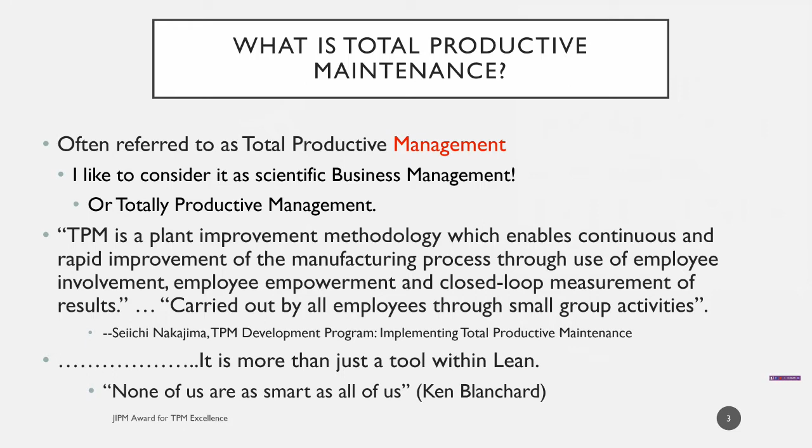In 1964, the award was just called the PM Award from JMA, Japan Management Association. It was changed to the TPM Award in 1971, and the first award outside of Japan was issued in 1991. Since then, only 93 awards were issued to 87 facilities in the United States. However, a total of 3,500 awards were issued globally since that time.

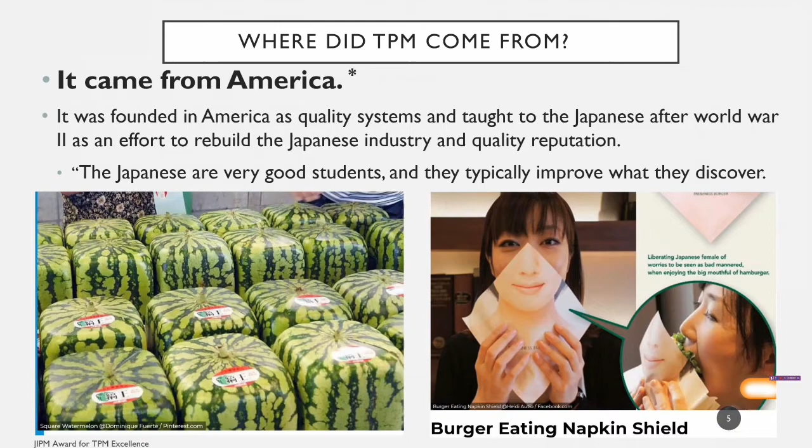Okay, so I think TPM is great, but where did it come from? The answer may surprise you, it may not. Actually, it came from America. And it started over 100 years ago in the 1920s. This is not new stuff. The Japanese are very good students, and they improve whatever they discover. So they did a lot of improvement over 100 years. It shares the same family roots as many systems commonly used in the United States today.

In 1947, Dr. Edwards Deming visited Japan as part of the U.S. outreach to help Japan reconstruct their economy after World War II. Those of you in the audience who are familiar with the quality systems and quality tools certainly will remember most of this story, and it'll be very familiar to you. In 1950, Deming trained engineers of manufacturing companies to improve quality and reduce manufacturing costs. He later realized that he was talking to the wrong people.

After training hundreds of engineers in the new methods and being asked for repeat performances before the engineering group, he began to speak directly to executives at major firms. And there he hit the mark. Just having smart engineers does not change the company. Management must believe in the scientific approach to manage a factory.

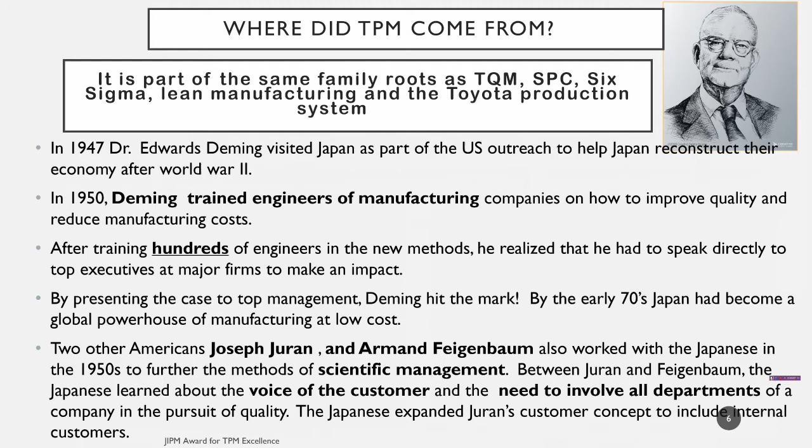The Japanese took to heart the teachings of Shewhart, Deming, Juran, and Feigenbaum and started to build one of the most powerful economic nations on earth. In 1971, the JMA created various awards for PM progress. And in 1981, the JIPM put the TPM body of knowledge into action and began to issue JIPM TPM awards.

Is lean part of TPM, or is TPM part of lean? Good question. The Lean Handbook from ASQ Quality Press covers TPM in 6 pages and defines it as a method for taking care of your equipment. They also credit TPM with one of the key metrics for any factory, which is OEE, Overall Equipment Effectiveness.

They also credit TPM for using several lean tools such as 5S, Visual Workplace, Pareto charts, root cause and corrective action, and standard work. But as I have learned over 16 years of deployment, TPM is not just about fixing equipment. It is about the proper way to manage a factory.

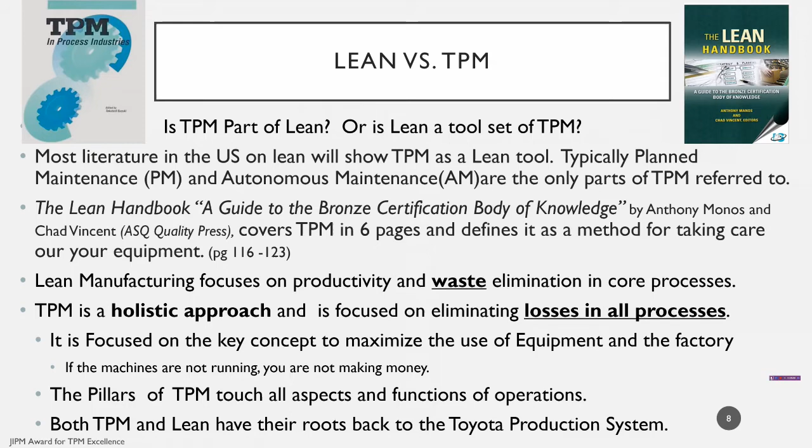TPM is a holistic and structured approach which defines key roles within an organization. And it is built on informative checklists and audits and reviews to assure that the entire company is focused on continuous improvements and holding the gains. This builds a strong improvement culture. The main thing is to keep the main thing the main thing.

TPM involves much more than just taking care of the equipment. The equipment must be running when it needs to run at full speed and making perfect quality. TPM achieves this by focusing on loss elimination. Take a look at some of the losses that might happen any day in an ink plant.

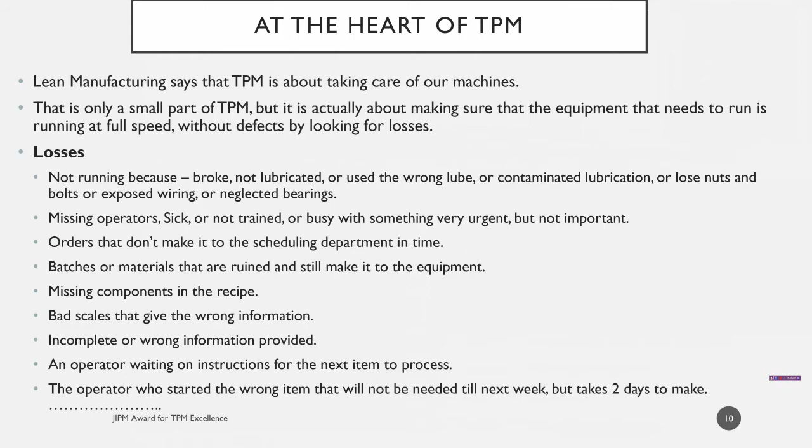Not running because something's broke or not lubricated, or you used the wrong lubricant and it seized up, or a contaminated lubricant and it was ruined, or loose nuts or bolts or exposed wiring or neglected bearings. Missing operators who are sick or not trained or busy with something very urgent but not important. Orders that don't make it to the scheduling department in time. All of these are losses that contribute to inefficiencies and delays in the manufacturing process.

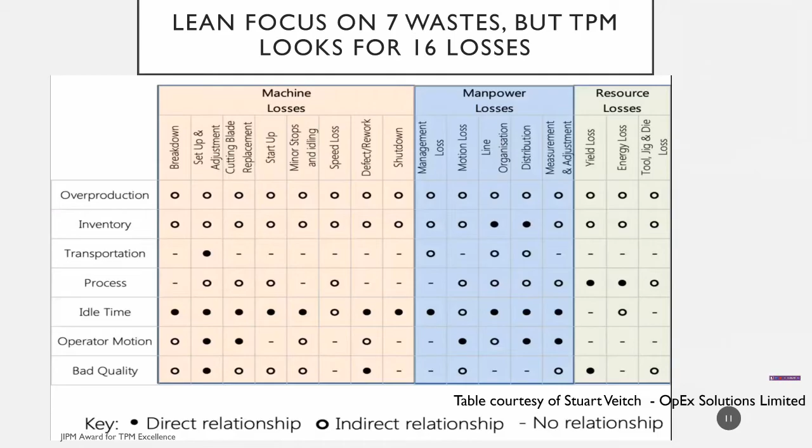TPM really emphasizes the importance of management living in the gemba, where it happens, on the workshop floor. It's difficult to solve problems and answer questions correctly while sitting in an office.

Visit with your operators and watch and listen. You will be amazed at what goes on, and you may discover things that frustrate the workers who make your products and your profits. It may also frustrate you to see what they're living with.

As mentioned before, OEE is an important metric, overall equipment effectiveness. It is a key metric. If a machine is available and it needs to run, it should be running 100% of the time at 100% of the maximum running speed, producing 100% good quality from start to finish.

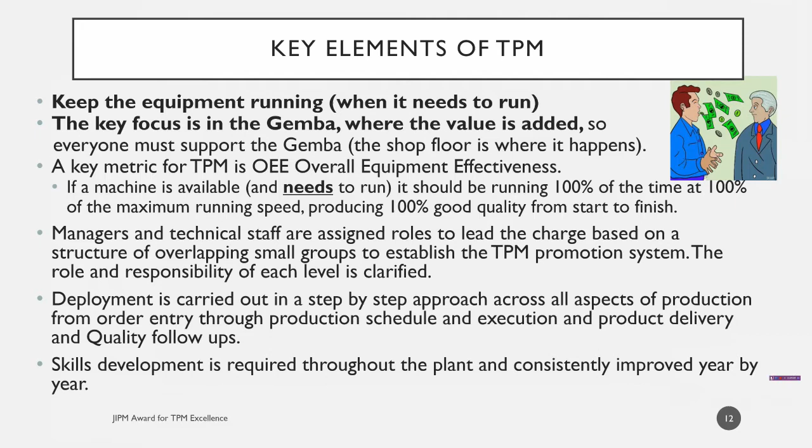Let's come back to the TPM award process itself. First of all, the TPM award is given to a facility, not a company, and each facility has to be qualified and assessed individually. The interesting point of the process is that by applying for the award, it gives everyone the opportunity to focus on understanding all of the fundamentals and principles of TPM.

If you review the requirements to pass, you soon realize that these are the keys to a successful and strong culture, which builds a strong business.

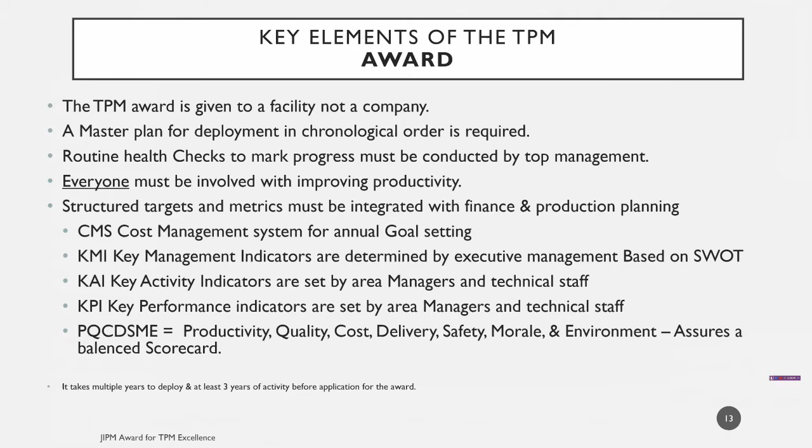You can see about the 5th bullet point down that the structured targets and metrics are integrated within finance and production planning. We have a cost management system for annual goal setting, key management indicators for executive management to use based on a SWOT analysis, KAIs, key activity indicators, which are set by managers and technical staff, KPIs, and a balanced scorecard called PQ-CDSME, which is shown in this diagram.

This board is used to track progress for each facility individually and as a whole. Each facility has a similar metric dashboard. Note that at the top of the board we have what I call the TPM Balanced Scorecard, or PQ-CDSME. You want to have metrics monitoring productivity, costs, quality, delivery, safety, morale, and environment. All these are covered by TPM using a pillared approach.

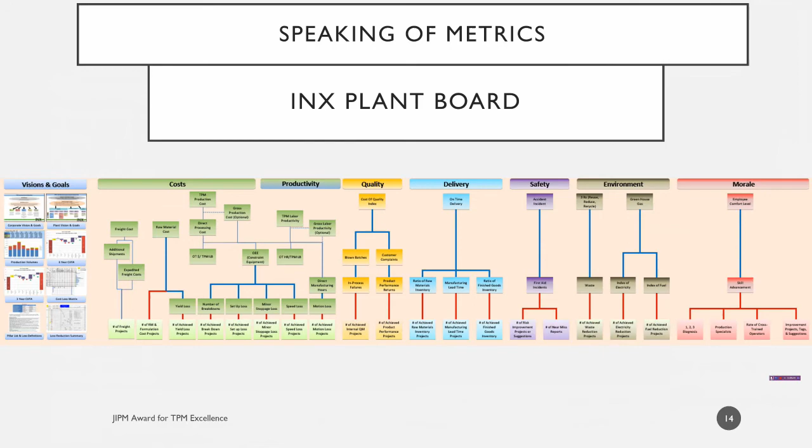There are several key checklists depending on award level. For the first 2 awards, there are 3 pages of checklists that contain 10 items for overall TPM policies and objectives, 10 items for effects and evaluation, and 10 items for each pillar of TPM.

If you're a pillar leader or a pillar guidance person, these 10 items show what should be achieved by that pillar. And then finally, 10 items for evaluation of overall results. If you want to see how your plan fares, download the checklist and rate yourself on all the points.

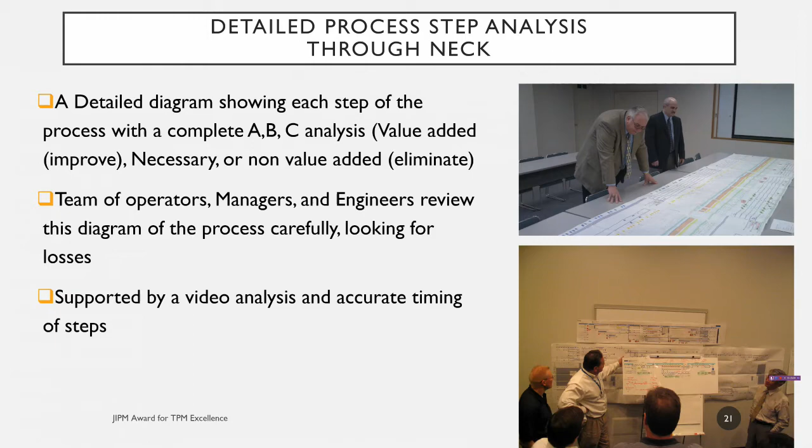One of our managers noted to me later that the Japanese just don't get it, they don't understand America, we build our parachutes on the way down. But today, in retrospect, the COO of our company has worked through many such analyses and thoroughly understands the complexity and the power.

And the value of this analysis tool. All right, so we got started with support from key executives of our parent company and the key executives of INX International. We then started to align our resources.

One of the key concepts of TPM is the concept of small overlapping groups in the organizational structure. From the graphic, you can see how this concept is implemented at the company. A member of each group is a leader or a member of the next lower group. These overlapping groups allow information to flow both up and down the organization without any problems.

Besides the overlapping groups in the command chain, we also had a support and promotion team of experts that supported all locations as needed. Many members of these support and promotion teams were actually pillar leaders, and most were also members of the operations management teams.

You can see on this side the plant structure, where each plant had a steering committee with various pillar coordinators identified and a chairman, and this committee was used to monitor results and track progress at their location.

On the right side, we had a corporate support structure that involved corporate pillar leaders, most of these being vice presidents or members of the operations management team, or management in general, as well as the board of directors, etc. From the top to the bottom and back up again.

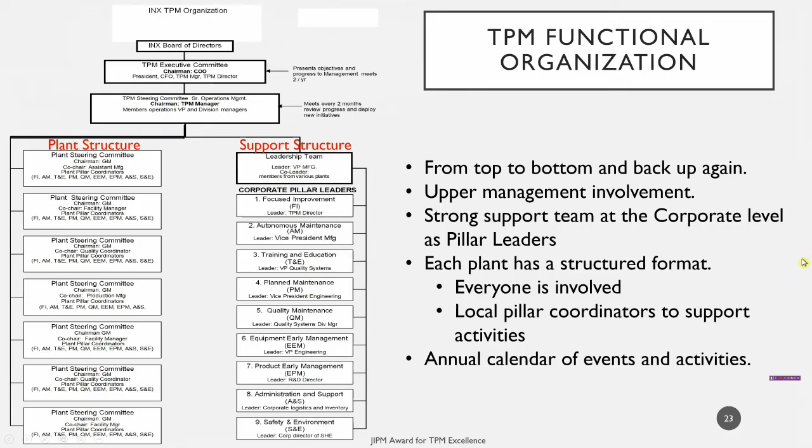Earlier I mentioned the checklists that are provided by the TPM application outline. Besides being the checklist for the assessment process, these checklists are very helpful as guidance documents for each pillar leader and all company members to see where you're headed, where you're going.

Within the scope of most lean activities, American deployment of TPM typically stays focused on autonomous maintenance and planned maintenance, as you can see here. And you'll find these pillars identified clearly in most activities for lean. But actually, TPM must be deployed across all 9 pillars, as identified in this chart here.

For the chemical industry, processing industry, we split early management into 2 pillars. So it's actually 8 pillars, but we split early management into 2. In essence, early product and early equipment management both use the same logic flow and similar planning tools, but it is also extremely important that early product and early equipment management work together directly.

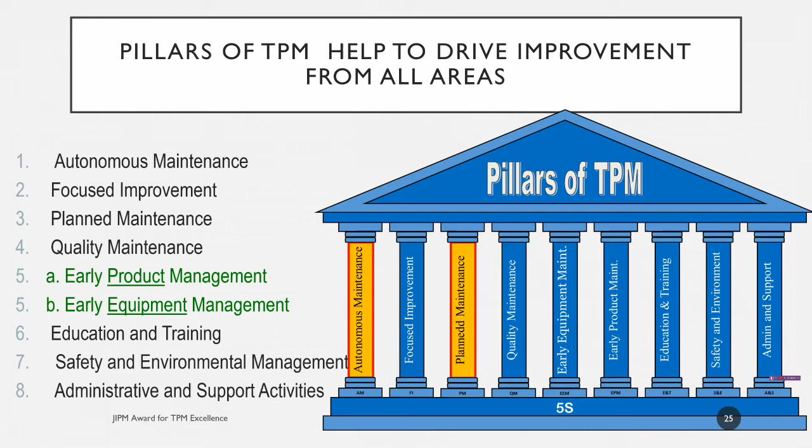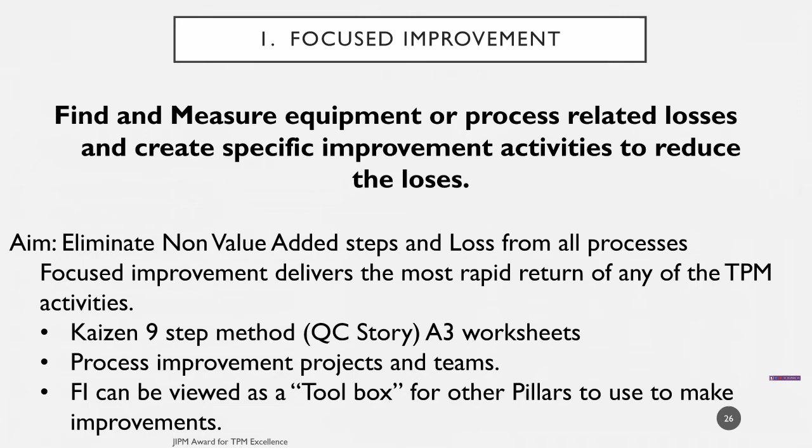So let's take a look at these pillars and see what each of them does and how they have an impact on the facility. First, focused improvement builds the skills for making scientific improvements to all of our processes. These projects can be conducted in any way, in any area of the plant, within any pillar. This is where the famous term Kaizen, Japanese for improvement, is put to work in TPM.

Number 2, autonomous maintenance involves every machine operator and every professional maintenance person working together to ensure our factories run smoothly without interruption due to machine failures. It is achieved by improving the operator's knowledge, making safer working conditions, improving the shop environment, and increasing employee morale.

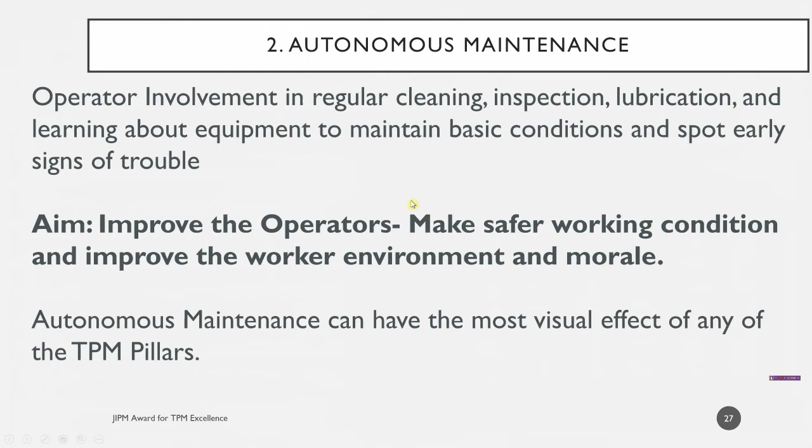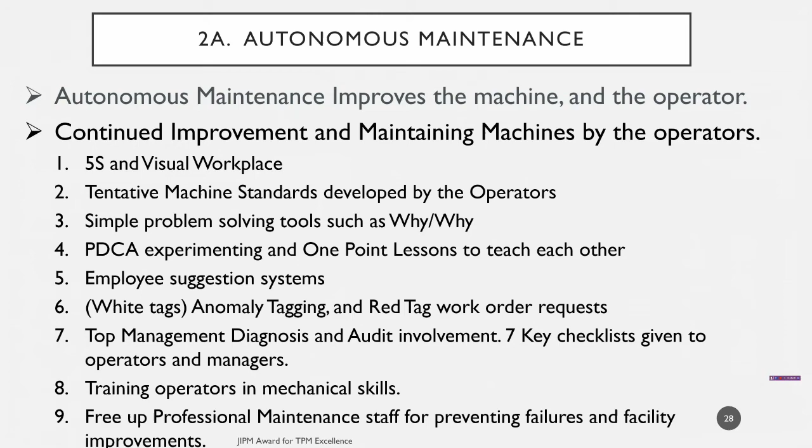I have personally conducted over 100 diagnosis meetings where we met directly with operators who were AM team members. I learned more about what happens in the company's factories than anyone can imagine by listening to the operators in these diagnosis sessions.

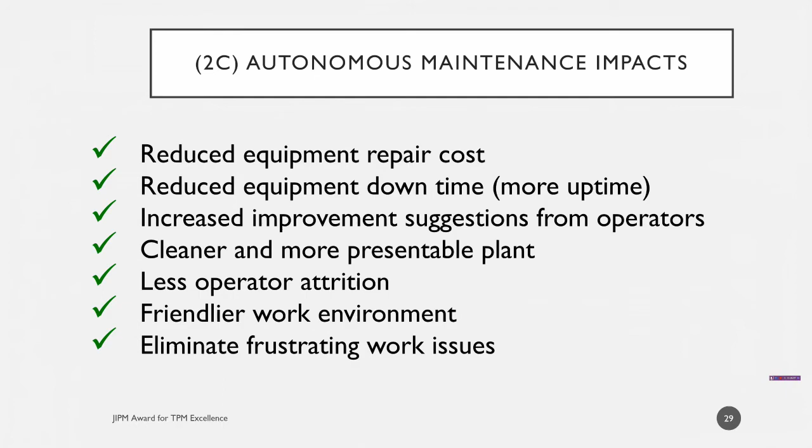Second pillar, autonomous maintenance, has many impacts on the manufacturing facility. This slide shows some of the key impacts that you can achieve.

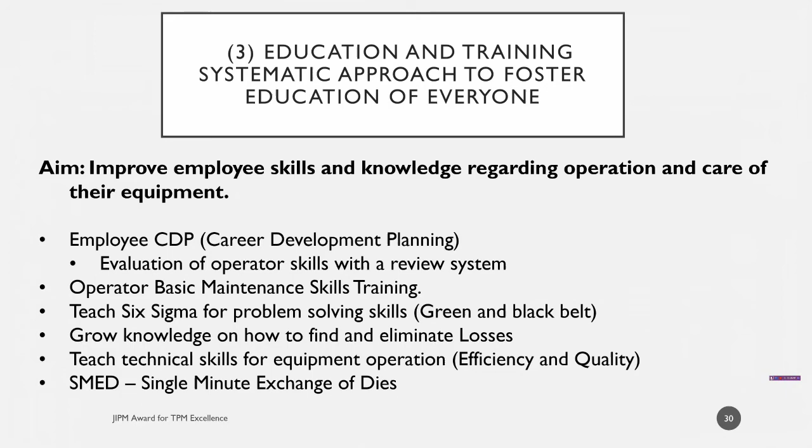Moving on to the third pillar, we look at education and training. Management values every employee, and using this pillar in TPM, the key is to improve operator knowledge and all persons' knowledge in many areas to help them thrive in their work and their professional life and career.

One specific training program required of all production workers is the autonomous maintenance operator basic maintenance skills class. This activity takes a long time and involves 3 TPM pillars working together: education and training, planned maintenance, and autonomous maintenance.

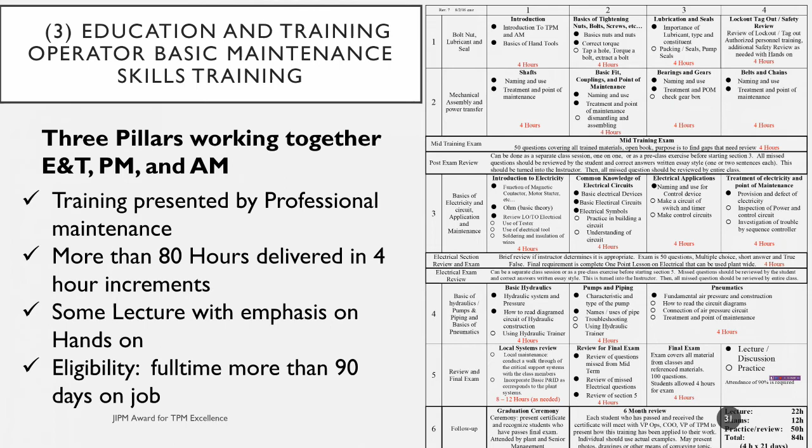After they complete this course, not only can they understand and sense when something's wrong with the equipment, but it also helps them with a lot of home fix-it tasks that they may need or want to do.

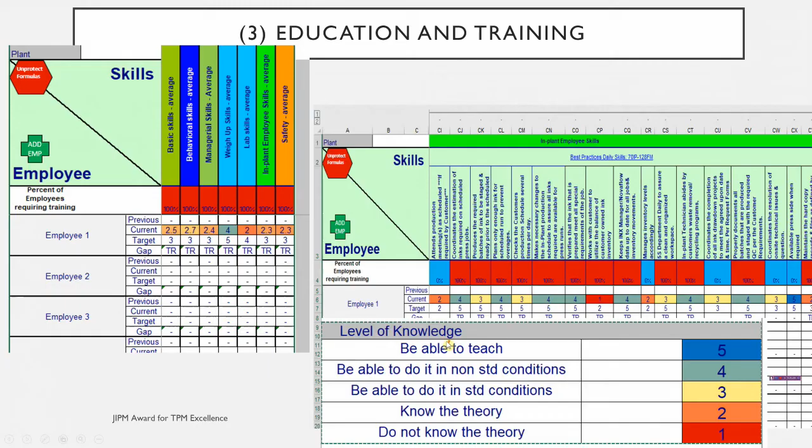Planned maintenance oversees the maintenance activities required to keep our equipment running at peak performance. Key elements of the PM pillar are a strong focus on mean time between failures, lengthening equipment lifetime, restoring deterioration, and predicting problems before they occur. By supporting the operators in the AM activities, they can increase the success rates for all of these items.

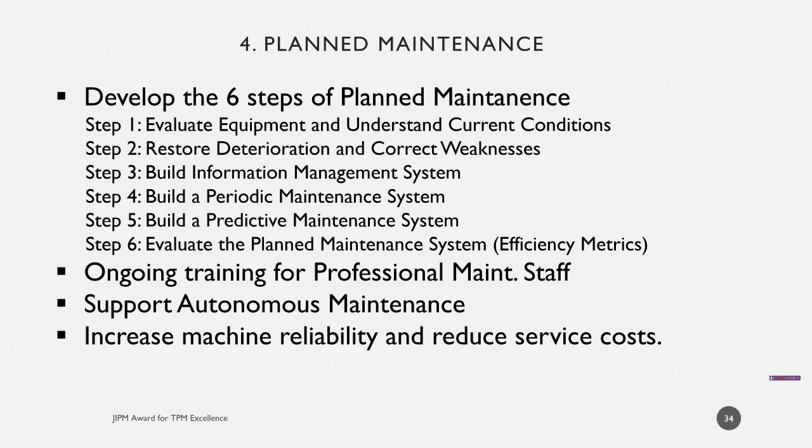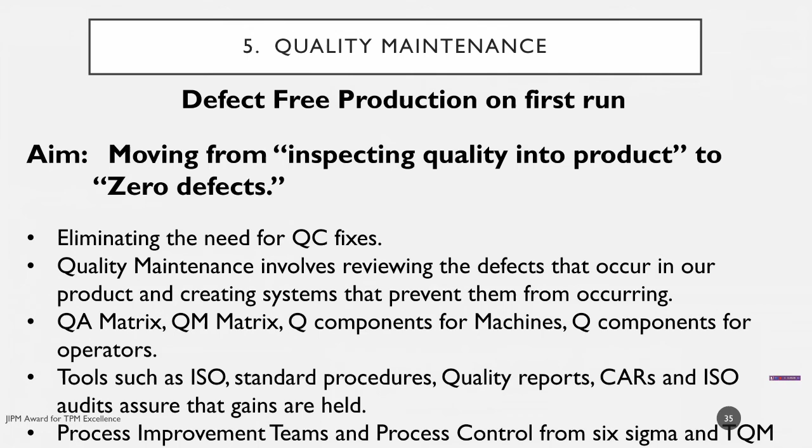The fifth pillar is quality maintenance, and this is not quality control. Using quality maintenance properly will help us eliminate the need for quality control, aka fixing problems at the window, commonly referred to as adds or adjustments. QM will help us move the lab to a QA, quality assurance mindset, simply testing to make sure the ink is correct and providing the certificate of assurance, COA, and statistical data to the customer. This pillar works in the lab and in production to accomplish this goal.

Pillar 6A is the first half of the early management pillar, but is focused on equipment. This pillar provides the structure that our engineering department uses to specify, inspect, and install the best possible equipment for our processes. A new machine startup process involves an OEE startup analysis to assure smooth operation when it's turned over to operators.

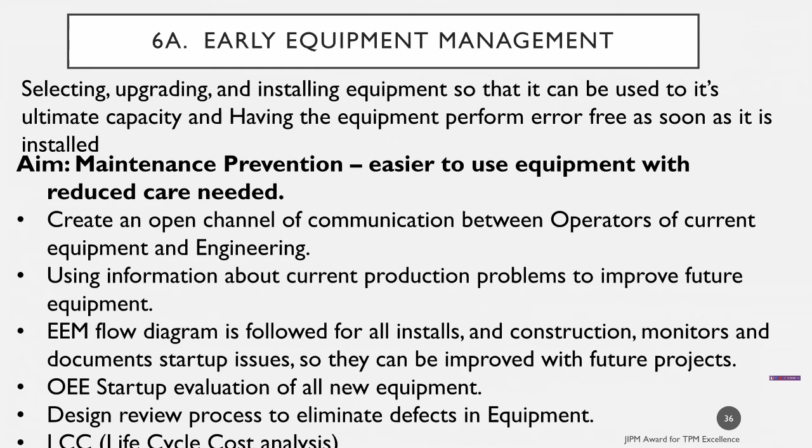6B is the second half of the early management pillar, and it focuses on products. This is basically research and development. This pillar is focused on creating and modifying our products to meet and exceed our customers' current and future needs. By working together with the early equipment pillar, you can ensure that the products are easy to manufacture consistently.

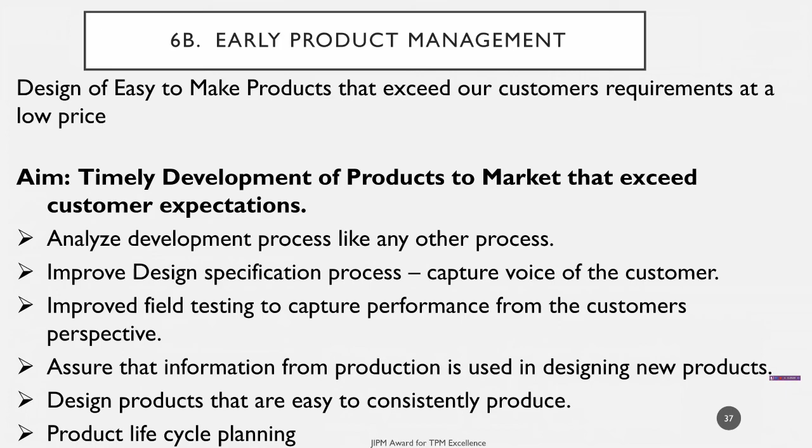Pillar 7, admin and support, has a wide reach. This is basically the pillar that touches all the areas that are not directly involved with manufacturing the product, but are critical to support of this process. It is responsible for improving the organization and management administration and support departments to better support our production and customer satisfaction. By adding this pillar, we can see that virtually everyone is involved with eliminating losses to our production process. The main thing is to keep the main thing the main thing.

Pillar 8, safety and environment. Maybe the last, but definitely not the least. Safety and environmental management is a big pillar. This pillar strives to make all employees safer. Training is used to help spot hazards and ask employees to continuously look for safer ways to do their job. This pillar is also responsible for environmental compliance. In the USA, this is a natural fit for the safety, health, and environment functions of a company.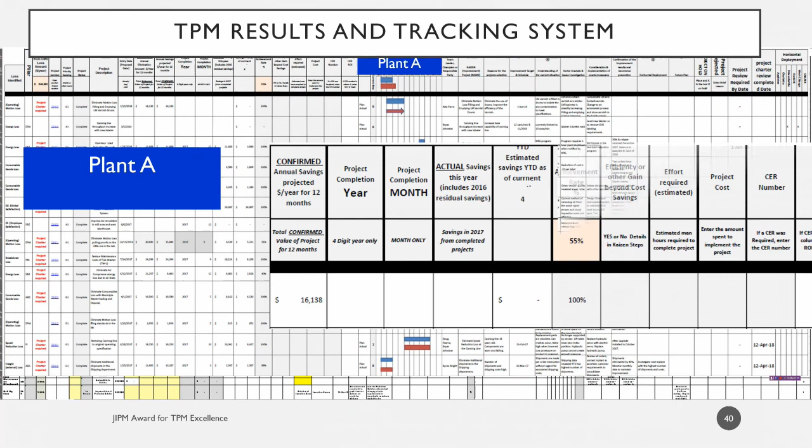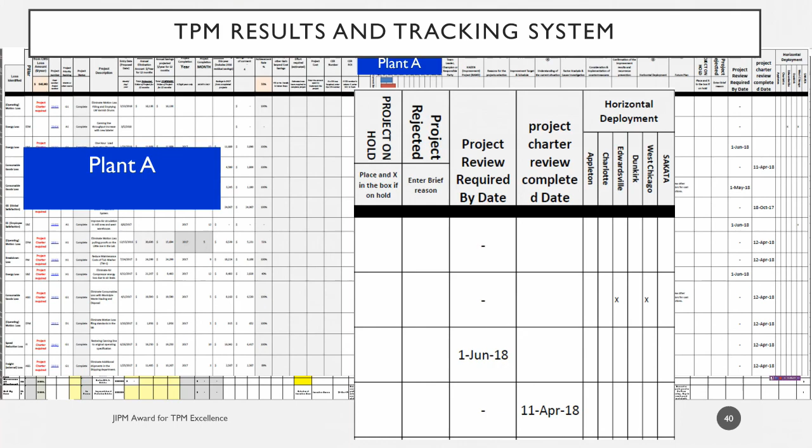Tracking to see when the project has been successful and confirm that the results were achieved. And finally, horizontal deployment to other locations or other areas of the plant.

So, what did INX get out of all this effort? This is an excerpt from the activity report that was submitted to the JIPM as part of the pre-assessment process. It lists some of the key benefits that were discovered. Besides growth and cost reduction, some of the big items were the elimination of breakdown interruptions, improved operators and facilities, and thousands of employee suggestions that were put to work.

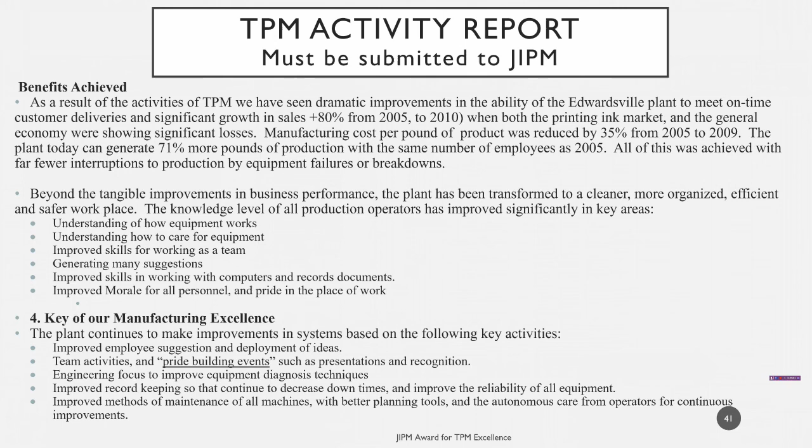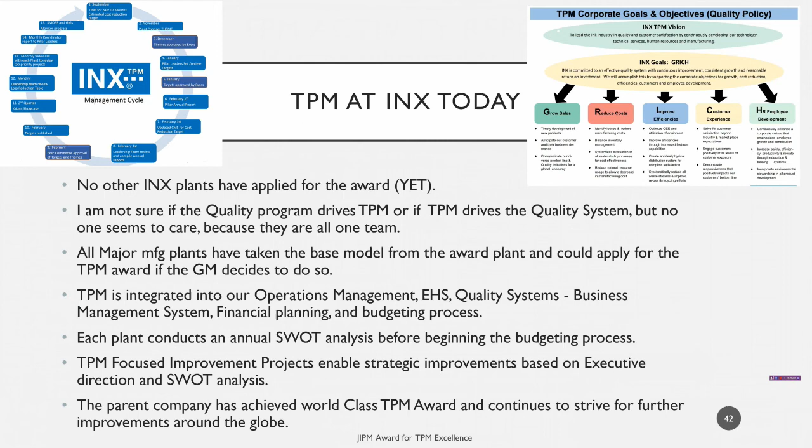Ten years later, TPM and the business management system have been merged together into a new way to think, plan, and react. The quality system and the TPM systems are integrated in a balanced manner. In the USA, INX has not applied for any other awards from JIPM, but every plant has a commitment from management that they will be supported for the application if they believe they are ready. They continue to hold Kaizen showcases and TPM health checks at all plants on a regular basis.